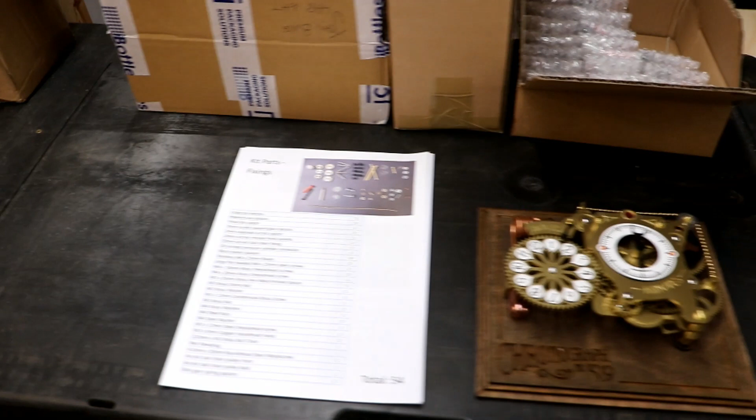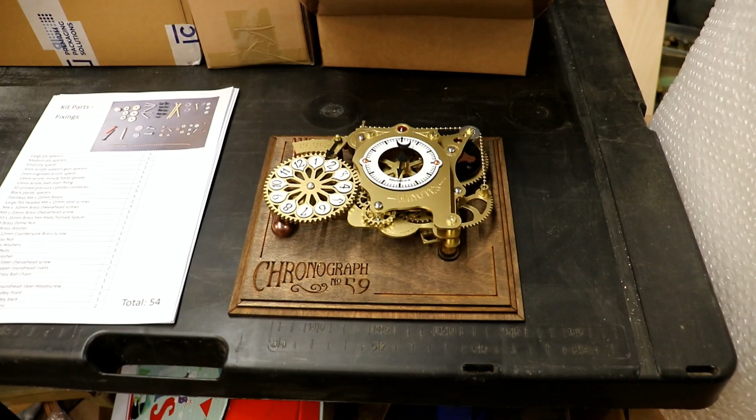There's also the other thing I've been working on, more chronograph kits. I nearly sold out of them and suddenly realised just after Christmas, so I've been very busy making more of them. But I can't get them in the box, even though I've finished making all the different bits of the kits.

Oh, look. Shiny things. These are the used nitrous oxide cylinders. In fact, once they're finished, they look like that. Beautiful. And I'm very pleased to say I found a load more.

I went out on an adventure with my son to one of those disused motorway bridges that you drive under, loads of them when you're going on holiday and things. And I always wonder, where'd they go to? Who uses them? Who are those strange people on them? Well, that day it was me and my son who went to one of these bridges, and thankfully found lots of them.

It's in the middle of nowhere, so the youths of today like to go and inhale their nitrous oxide there. And the reason it's in tinfoil, if any of you haven't watched any previous videos, is that the x-rays that the postage service use picks up this, and then they open the box and they find the cylinder, even though it's drilled out and has a label by it saying this is not prohibited because it cannot possibly hold gas. They then pack it all up and send it back to me. But since I've started wrapping it in 4 layers of tinfoil to stop the x-rays, hopefully, touch wood, I'm not even going to tempt fate actually.

So that's that. So all I'm waiting for now, having had all 130 parts and things successfully delivered and made by me, is the wretched plastic rod company. I'm still waiting for the acrylic tube and the acrylic rod to make the mercury compensated pendulum from.

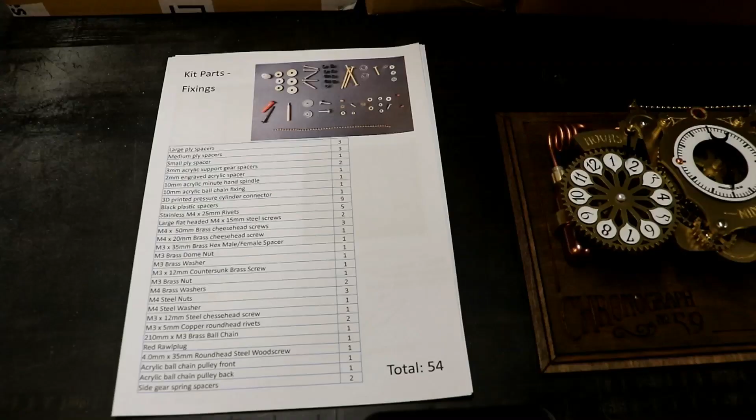So, whilst waiting for that, and I'm assured that they're going to send them off soon, I thought I'd start a new little series of videos, something I've been thinking about for a long time. That is a how-to series of videos.

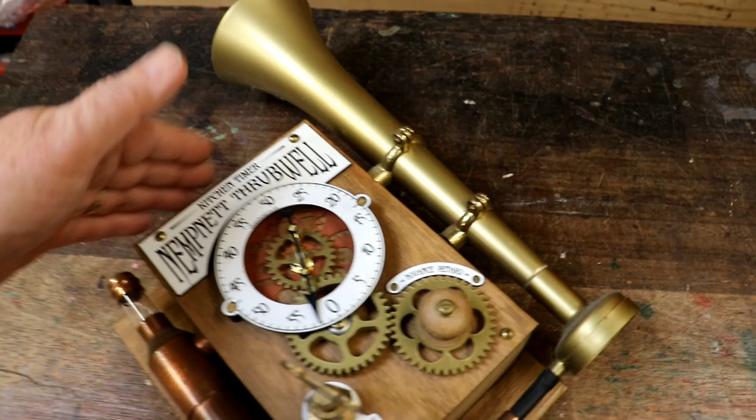I often get asked by people, here's the original lovely Nempnett Thrubwell. The original one I've still got in my kitchen, hence the filth. I do apologise if it comes out on the screen. How to do this. I thought I'd make a series of videos just focusing on particular little bits, elements of my steampunk inventions and creations and things.

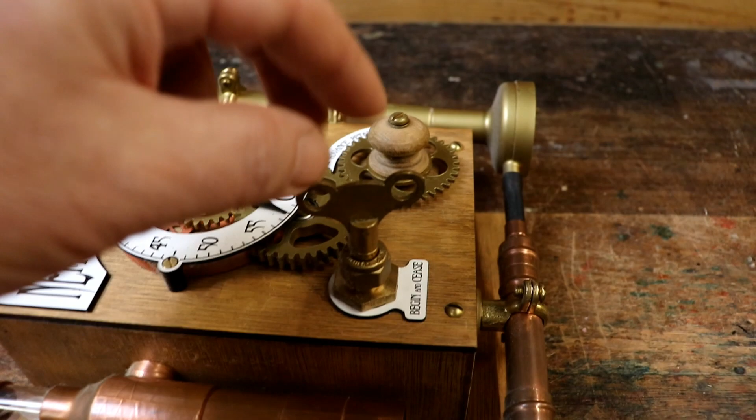And lots of people have asked me about this on and off switch, which does obviously function properly. So I thought today, dear friends, I would explain how you can make your very own one.

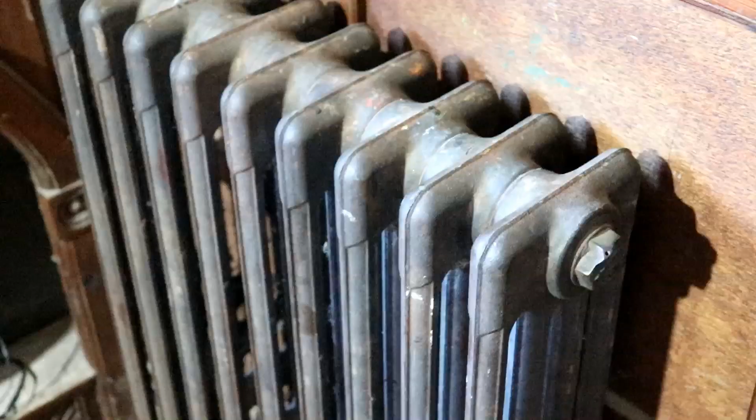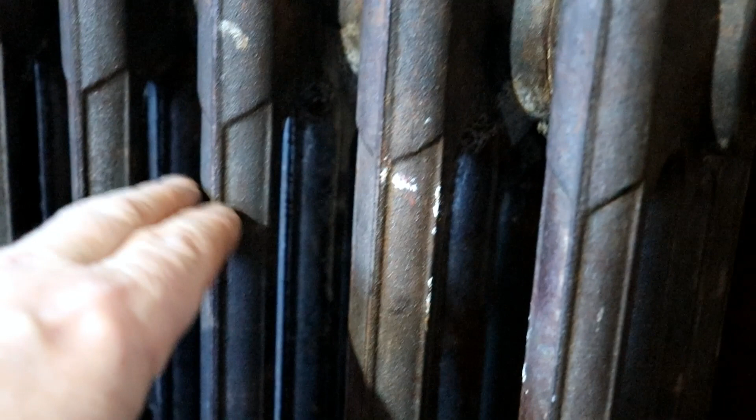So to demonstrate, radiator bleed valve key, here's a lovely old radiator I rescued from somewhere, and in one end, and this goes for all modern radiators as well, there's a little square-ended bleed valve. You put that in there and you twist it and it lets any gas out, because if you haven't got lovely additive, Fernox, no, something else I can't remember, lovely additive in your water that goes round and round in your heating system, corrosion slowly produces gas, and it collects obviously from the top, slowly working its way down and stopping the radiator from being efficient.

And if you let the gas out by undoing that, the water can rise back to the top and increase efficiency. Hey, thank you. They vary in price enormously. You can find them on eBay and Amazon and other places for sort of, I don't know, £6 or £7 each.

I think the most expensive was £13, or if you look around and go to proper plumbers' merchants, you can find them for about as little as £1, perhaps even less. But they're solid brass, which is lovely.

You could use some sort of other knob, but if it's plastic and you spray it with brass paint, because you're constantly going to be moving it with your fingers, it's very likely the brass paint will rub off. So this makes the perfect solution.

Then there's this bit which I use to support the switch. This is an 8mm to 15mm compression fitting adapter. Inside it's got olives - not the ones used with alcoholic beverages or salads, but these little copper ones. You put an 8mm piece of pipe in there, tighten this down, and it crushes the olive against it, forming a perfectly tight seal. Same with that end for a 15mm pipe.

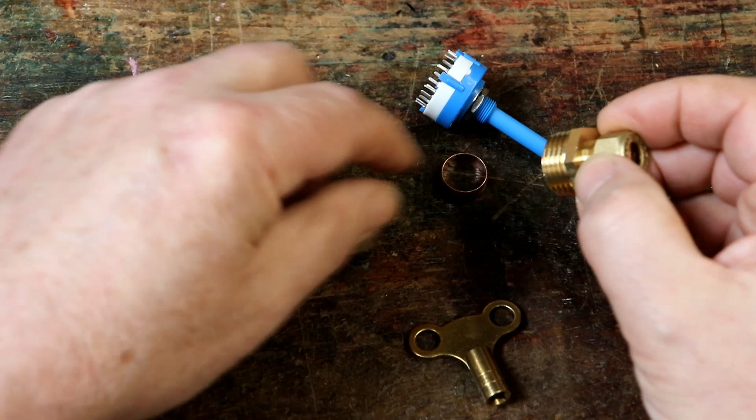Now we don't need the olives, so we're going to get rid of them. We're not going to throw them away, we're going to save them for a rainy day, which has not yet arrived - I've got a box full of these things, I can't bear it. Right, so we end up with this.

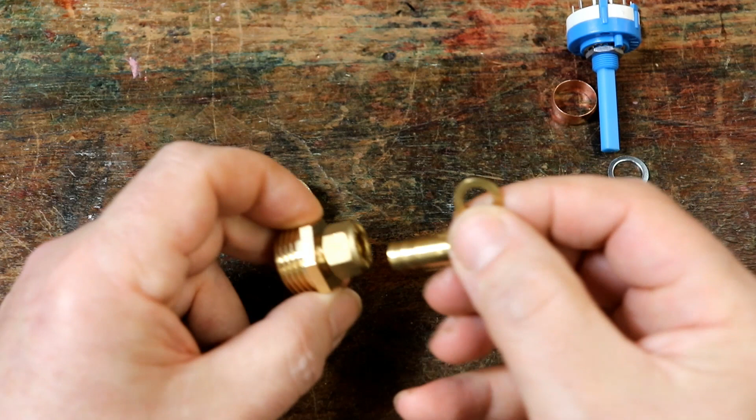First thing to do is to drill this out to 9.5mm. Obviously it's 8 at the moment to allow an 8mm pipe in, but this needs to be about 9.5. So we'll drill that out on the lathe so that the key will then fit into it, like so.

I'm going to drill it out with a lathe, so I've clamped it into the chuck. I've got the 9.5mm drill bit here, high speed steel. If you haven't got a lathe, you could clamp it firmly and drill this on a pillar drill, or even with a hand drill, because you can use the 8mm hole as a guide. Right, safety goggles on, in case anything untoward flies off.

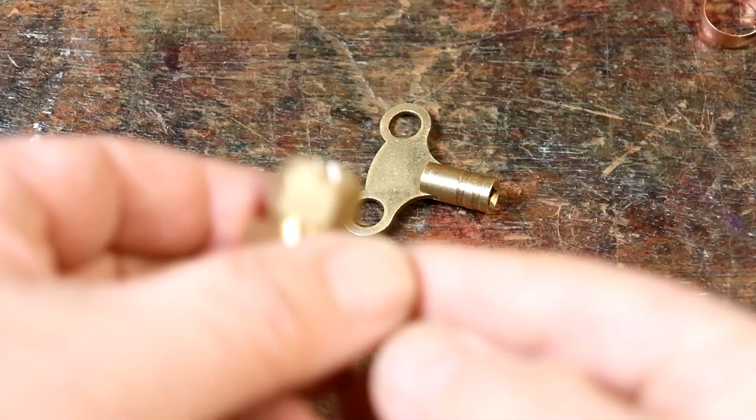And voila! So there it is, drilled out, and the key now fits in. You can see there's a nice lot of leeway as well, so when cutting the spindle of the switch to length, the tolerances are quite large.

Talking of switches, let's talk about switches. These are rotary switches and they're ever so useful. They have a little locating lug there, so if you mount them in a panel you can have an offset hole to stop everything twisting round.

And generally these ones commonly come with 12 different positions. Now this is a one pole - I'm going to go and check that actually. I've checked and I was right, but it's one of those things as you get older, you think you know something and then wonder, do I know that, or have I just invented it?

Poles and ways. This is a one pole, single pole, which means there's in effect one wiper in there, 12 way. So that wiper can move round these 12 different switches, one pole, 12 way. Equally with this, as you can see, there are some other pins here that have been cut off because this is the one pole version.

You can get a two pole version. That's the wonder about the number 12. If you have a two pole version, it's 6 way, because then one wiper goes over those 6 contacts and the other wiper goes over the other 6. And you've guessed it, you can have a 3 pole 4 way, and you've guessed it again, you can have a 4 pole 3 way.

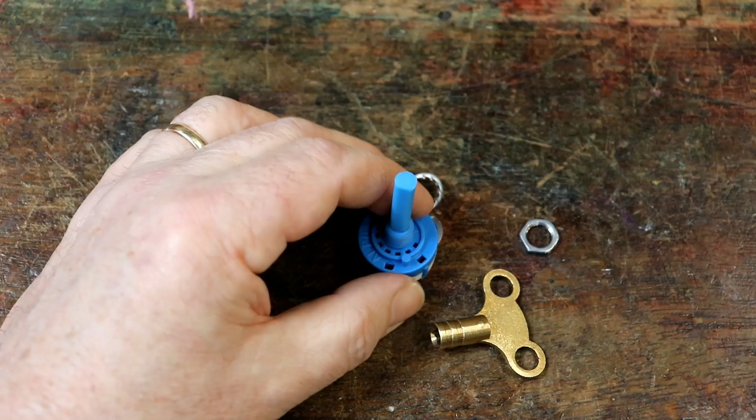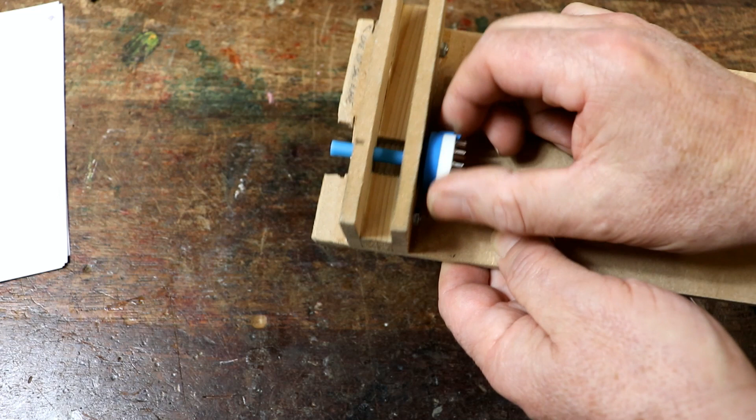Here it is. I realised if I drilled and made a jig like this that would sit on the bandsaw, I could poke the switch through here, and that little prong, the locating one, could fit into one of 4 holes. If it's set at 0 to start with, you run that against the bandsaw blade, turn it through 90 degrees, and if you set it right, you end up with a square end. Let's go do that now.

There's a little notch there where I've used this before, so I'm going to set this up against the guide about there and lock it as a starting point. This is a good thing about batch production—you set it up once, then you can cut 20, 40, whatever you want after that. But I'm going to start with it a little bit over with a bit of space.

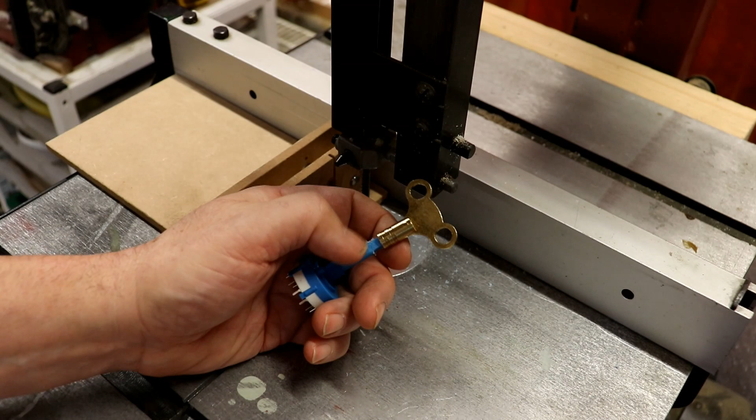Perfect. So that now fits onto there, and I've glued it on before, usually with super glue, but you could use epoxy resin or something just to fix that on there.

Now I need to cut this down to the right length, and luckily the jig also caters for this, because I turn it round—little notch there. So let's get that set up. Right, and cut that off.

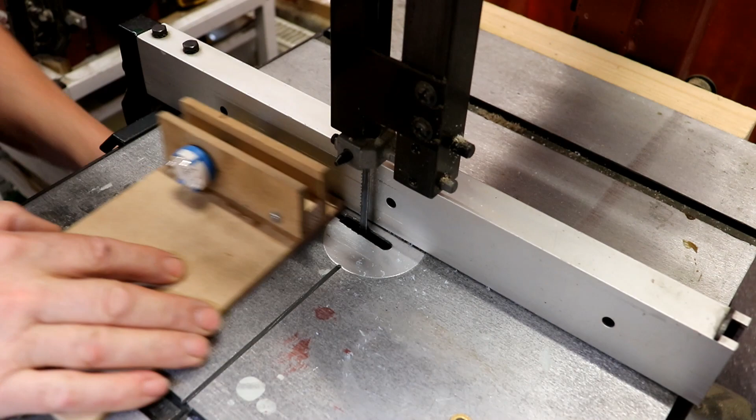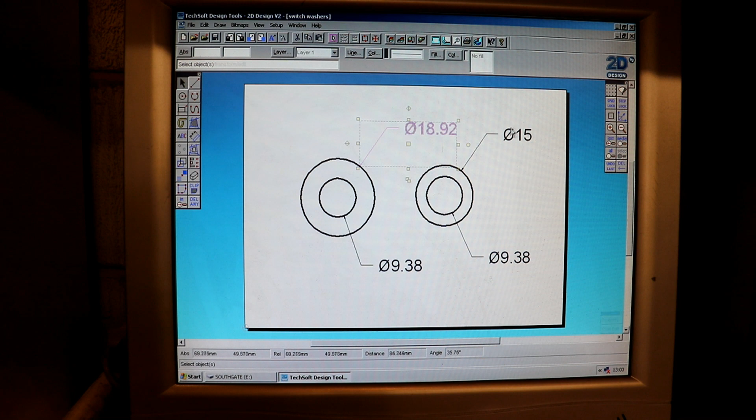Now for the arduous task of changing this—I say arduous, nothing was really compatible, so what I have to do with all the drawings on 2D Design is export them as a DXF file, which is a pretty standard format.

Let's go to desktop, because I've got temporary, there we are. Save that there, yes, okay.

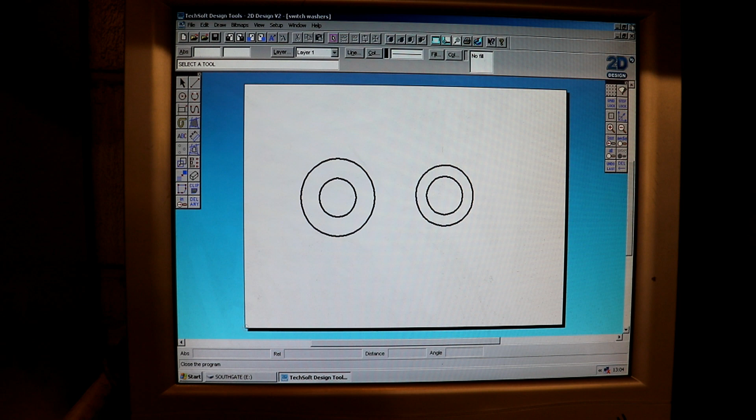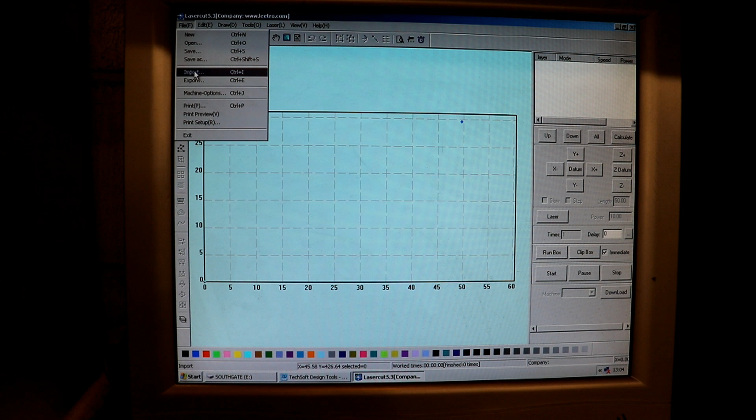Then I can close this and open the laser cut software that came with the laser cutter, which, as I've said before, gives the impression it was sort of a homework project for someone at computing college, as it doesn't do some really obvious things that it should do.

Hang on, forgotten where I am. Desktop, temporary, open. Look at that, all that faffing about just to get these done.

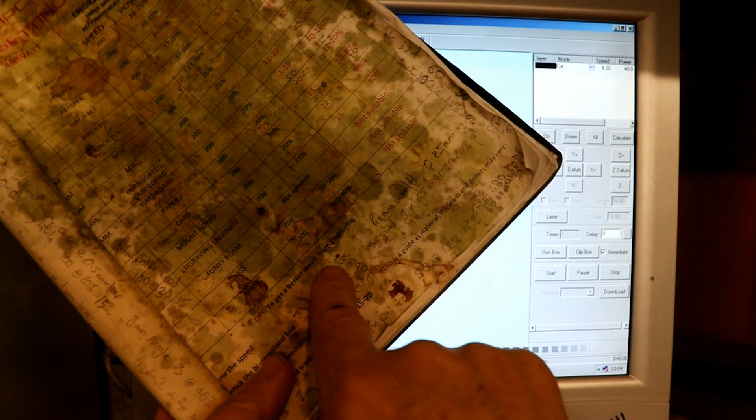Now they're in there, I can use my... I must sort this out one day, this is invaluable, I should really look after it a bit better. Well, it's the family taking stuff out of the freezer and resting it, and all the food juice on it. Lovely. 15mm a second at 40%.

That's 2mm acrylic. So what we do is go up here, and we go to—what did I say? 1540, that's it. 15, 40, 20 for corner power, which is usually half of the main cutting power.

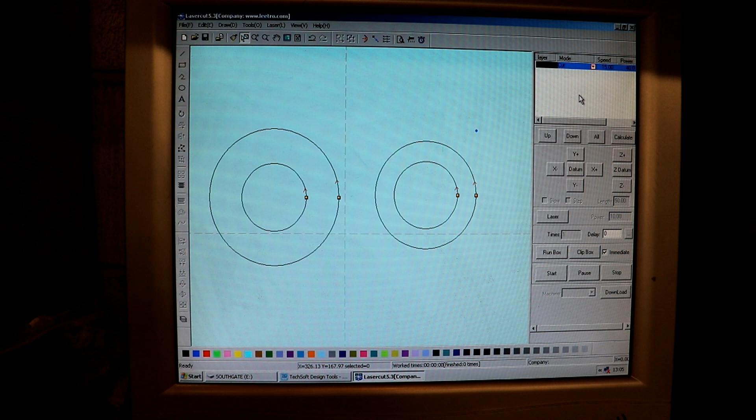Right, that's that. And the stupid thing is it doesn't remember it. When I was in education and we had laser cutters, the software that ran it let you have a whole library of different materials. Not on this. Even when you close this drawing, it forgets everything, so you can't even load a new version of it. But it's a small price to pay, don't get me wrong.

Let's switch the laser cutter on. It's a very small price to pay—the fact I can sit and design things here and immediately cut them out is just beyond belief. It really is such an exciting thing to do.

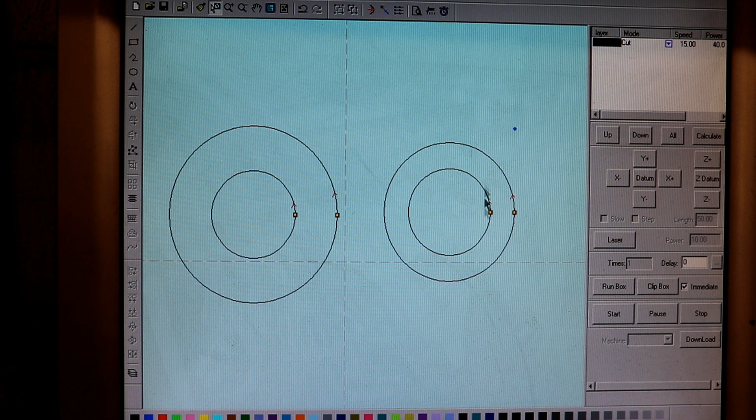A useful tool this has, though, is Unite Lines, and it joins up any loose lines and also works out theoretically which ones to cut first. So it should cut these two middle ones, then the outside.

Let's go to download, delete all the drawings on the laser cutter, and download this. I delete everything else because my brain can't cope with it.

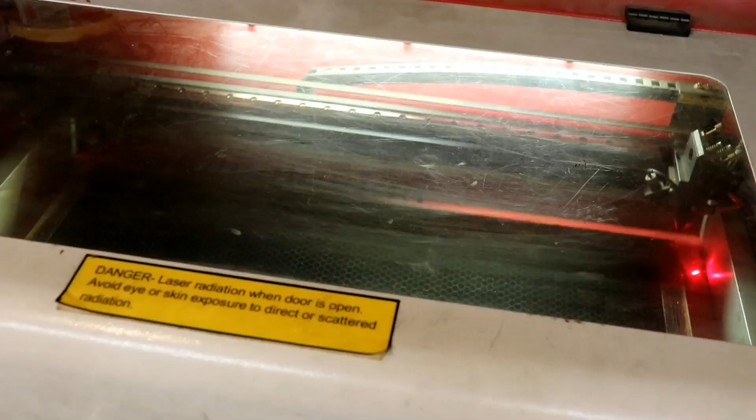Okay, so I open the laser cutter. Apologies for the noise of everything. Right, here's some 2mm acrylic. Waste not, want not, so I always use as much of it as I possibly can.

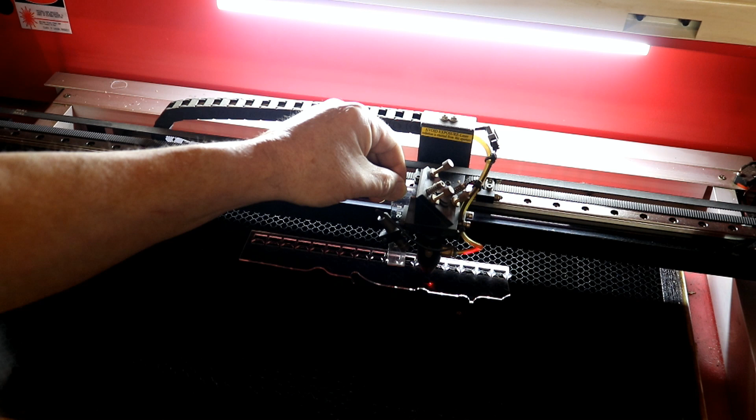I'm going to sit that on there, and then you need to focus the laser with something like this. You put that on there, and with this particular laser cutter, you press Z, and the whole bed of the machine goes up and down, which is useful because it means you could engrave a huge chunk of wood or some material. That's it, it's just right now, so I'll press Z again, and then we can set this to where we want it to start, or move that, which is quite a lot quicker.

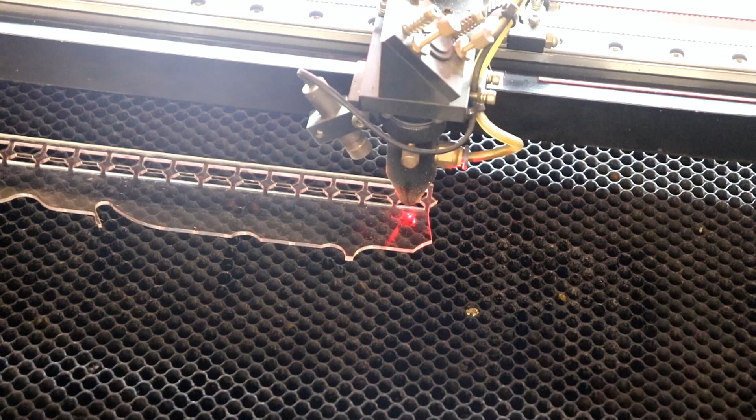Right, then we can say—oh, can you actually see any of what I'm talking about? No. Oh, excuse me, it's the doorbell. That's exciting, that was the plastic rod I've been waiting for arriving.

So there we are. What we can do now is go to test, which is useful just to check—I wasn't looking then—just to check that everything we want is going to be able to cut out and fit. Let me press start.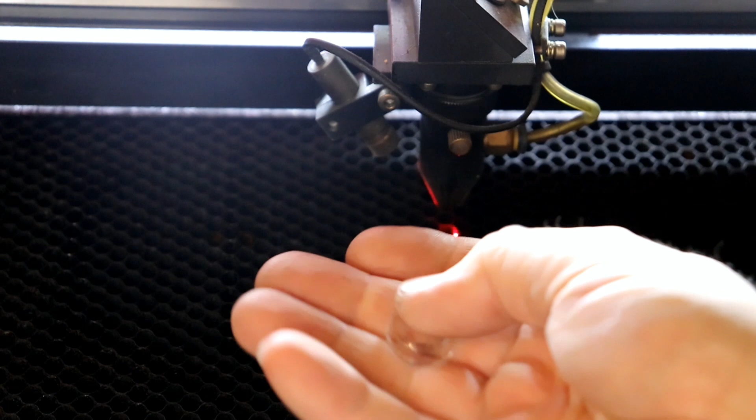Voila! Okay, and there we have our two washers. Isn't that amazing? I just cannot get over how incredible it is being able to create things so quickly and accurately, such high tolerances. Anyway, stop talking.

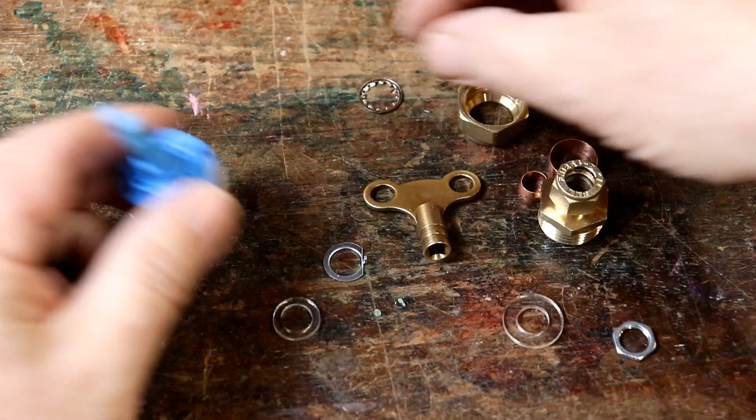Here's the plastic that's just arrived in a very well packaged tube. Right, we've got all the bits. Now we need to decide and set, remembering to turn it anti-clockwise first, how many clicks we want, basically how many ways we want. We want 2 ways. Before we do that, this little prong gets in the way. On occasion I've cut all these off before realising my jig needed them. What fun we had. I remembered this time, so I just snipped it off.

Now we need to put on the smaller of the two plastic washers. Then we put this on - you can see that holds that in the centre. Then we put this on - that holds that in there and clamps it all together.

And then, this isn't going to work. This bit can be a bit fiddly, and because the camera is on, it is going to be absolutely... there we are, that wasn't too bad.

So we'll tighten that up, not overly tight, but now that means it's very useful because we want to clamp this down, so you can still turn this round once you've got it all fitted together. I'll show you what I mean in a minute. Now you can see this can be used to clamp onto a piece of wood, and that leaves the top free, and that now pushes on there, and now we've got our 2 clicks.

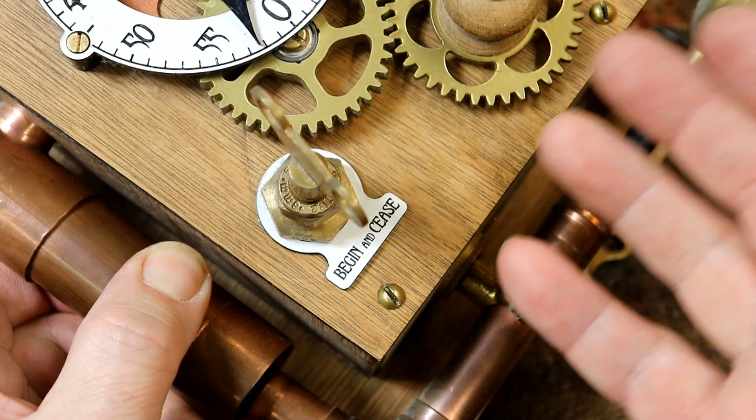For example, begin and cease. Obviously, being steampunk, you can't say start and stop or on and off. It has to be Victorian style wording and phraseology, hence the advanced retard. We do like that, advanced retard.

Let's go and do that. Here are the hole sizes for the other bit. There's the hole, 21mm diameter, that accepts the brass fitting through a piece of wood, plastic, whatever else, and the same 21mm diameter hole here, and this is going to be an engraved label.

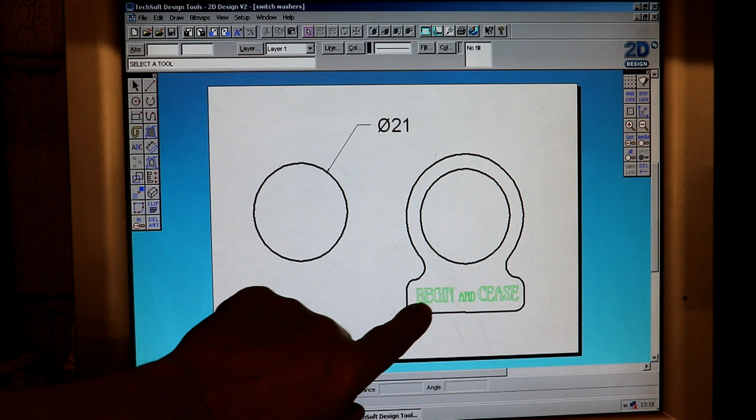The actual text is going to be so small that I'm going to use raster engraving for that. I will explain in a moment, but let's first cut this hole out of a scrap piece of wood that I've got. One top tip that is pretty obvious, but I never thought of, is if you've got lots of fiddly little bits to cut out of stained wood, rather than cutting them all out first and then staining them...

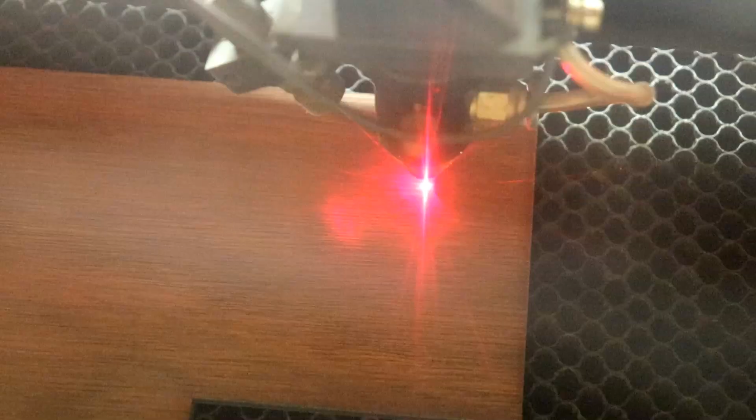...you've got it - stain the wood first, it goes very dark, stain the wood first and cut out all the bits afterwards. The nice thing about laser ply is that it cuts quite nice and darkly along the edges. For a 3mm laser ply, it's 10mm a second at 40-20.

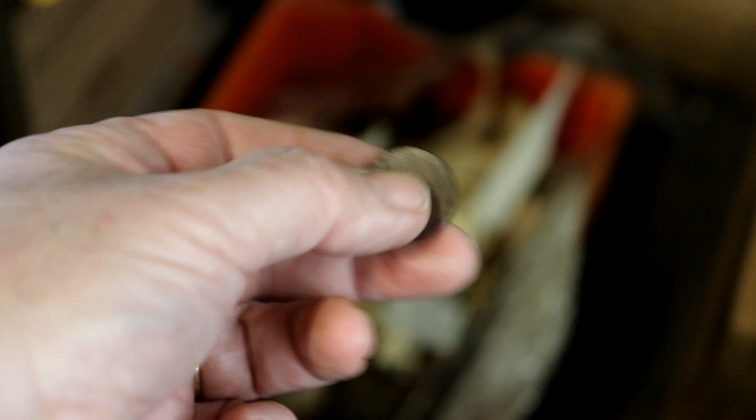As always, the exciting offcuts never thrown away. They're put into the bin of exciting offcuts, which once it's full, I will happily send to someone if they pay me for the postage. It's nice to know it goes to a good home. In fact, someone's already vouched for this lot, bagsied it.

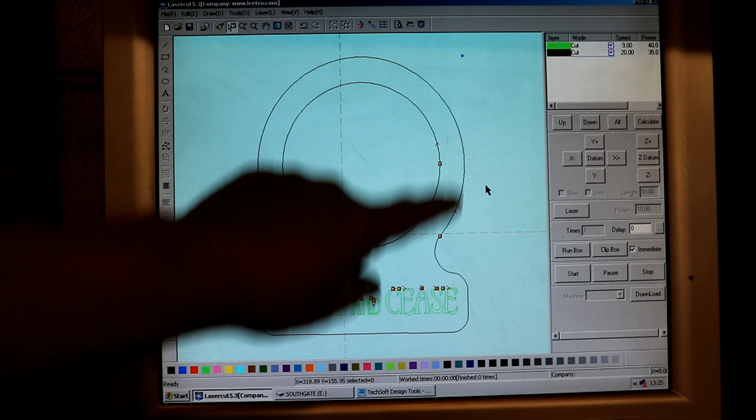Right, onto the engraved label. So we're going to cut it. That's the other useful thing about the software, is that you can have different colour lines representing different types of cuts, even though it can't remember any of them anyway. So black, I'm going to be cutting this piece of laser engraving laminate out, and I've worked out through experimentation that the cut needs to be 20mm a second at 35% power, 15% for corners.

This, however, the text, I'm going to change to engrave, and luckily it automatically sets that to some very complicated settings. It goes at 200mm a second, power 25, scan gap 0.05, so it basically draws this, engraves this, rather like old-fashioned tellies did, where it scans, a raster scan.

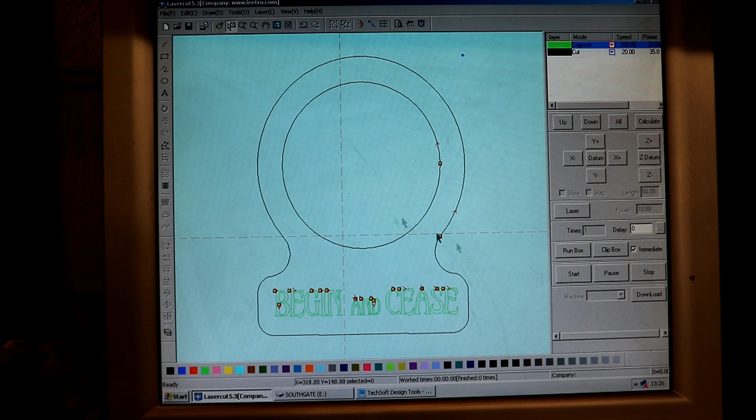Let's download that and get - oh hang on, I nearly forgot, let's unite lines. There we are, that puts it back up, just to be annoying. Download that and I'll show you what that does.

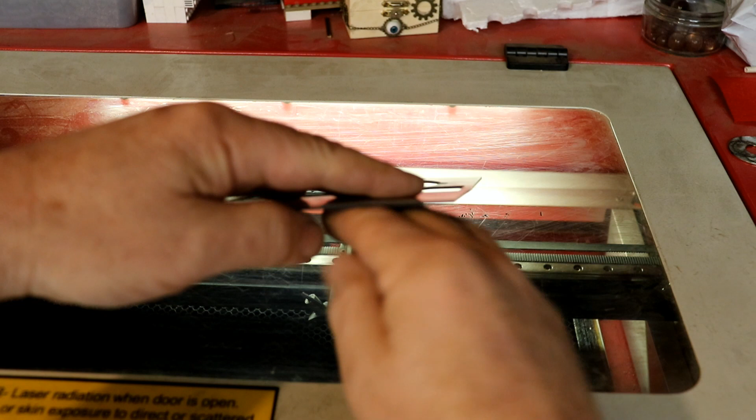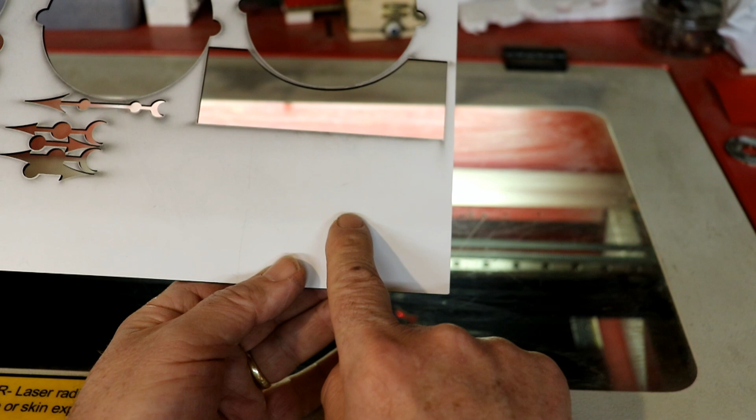Laser engraving laminate comes in all sorts of different colours, but it's basically a thicker background substrate. Try and focus it on the back - this is black substrate, with a very, very thin layer of another colour on top, which in this case is white.

So if you burn through this with the laser engraver, it will leave you with the black showing. Let's do that. As always, I've focused it, and I'm just going to check that that fits. That's it - waste not, want not.

Now it starts, and it should start by doing the raster engraving. Because it's so precise, you can get very small, high quality engraving done with it. Although, as I've said before, if I was going to engrave bigger things, much bigger letters, I've found that having the outline of a letter and then drawing contoured lines inside about 0.1mm apart, you can go far faster and more efficiently, because it only has to cover the area once.

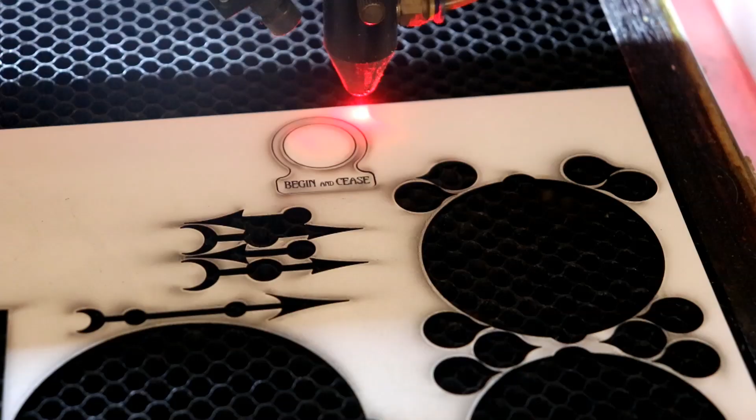There we are, now the power's changed and it's going to cut it out. Lovely. Funny thing about laser engraving laminates is it just pongs a bit.

You can see the detail, and you can also see there's a bit of soot around it, so we'll use some isopropyl alcohol to clean it off. I was also pleased to find that white spirit will also get it off, because if people are building the kit and haven't got any isopropyl alcohol, white spirit is a much more common thing to have.

Wood alcohol or methylated spirits equally work well, although nail varnish remover, acetone, doesn't - it's the work of the devil, because it also dissolves the white plastic off the front, and if you clean too much soot off, you end up cleaning all your letters off.

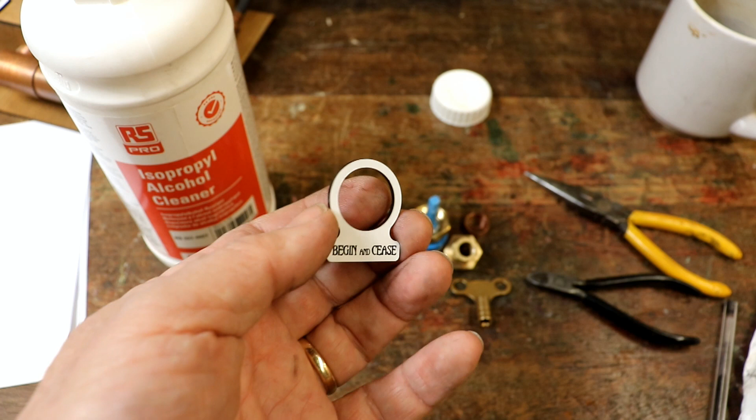The other thing to mention about laser engraving laminate is, as with everything I suppose, it does come in all sorts of different qualities, and it is well worth finding a good source of it. I ordered some slightly cheaper from a company some time ago, thinking this is good, this is a lot cheaper, and it produced so much soot and stink that you couldn't actually see the lettering that was engraved. It was absolutely ridiculous, so I sent it back and made a fuss. Whereas this, as you can see, that's beautiful - such lovely sharp, crisp lettering.

Okay, let's see how we can assemble all this. Right, there's the front bit, there's the label - nice. Then we have that through the L, that's looking nice already.

We can screw that up tightly like that. I won't do it for now, but basically a pair of pliers or wrenches on either side, you can tighten that really nice and tightly. Then get this positioned - I always try and get this centered because it just looks nice.

You can tighten that up really tightly. Then you can sit the key on top. Now it's time to try and position it - obviously that's in the wrong position. So what you can do, because we didn't tighten this too tightly, is just twist that round a little bit. Oh, look at that, perfect.